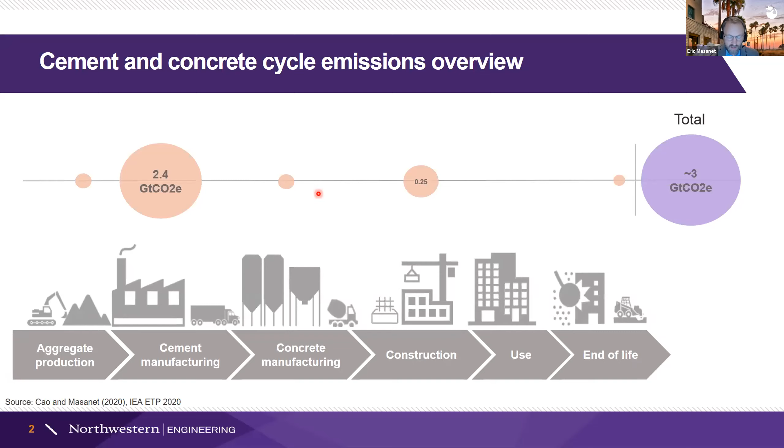There are point source emissions across the cycle. The other major contributor to this overall carbon footprint are the various transportation activities, particularly bringing raw materials from mines to the cement plants, but also shipping of concrete, shipping of cement, and then shipping of demolished building materials accounts for about 10% of the emissions of this cycle.

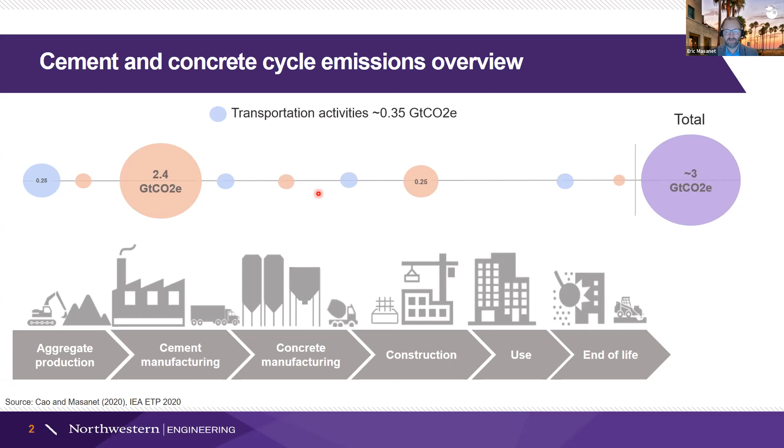So again, this cycle is one of the most important for well-being that we have because concrete is used everywhere in the built environment. It's crucial for development, it's crucial for daily life, and it amounts to 9% of energy-related CO2 emissions. And it's been very difficult to abate so far, and I'll explain why.

But before I get into the decarbonization options, I'd like to acknowledge that the cement industry has made significant progress over the last few decades. So the first graph I'm showing you relates to the thermal intensity of cement kilns.

But there have been some tremendous efficiency gains that have been realized since roughly 30 years ago. 30 years ago, it took around 4,300 megajoules to process a ton of clinker. Today, that value is around 3,500. So we've seen energy efficiency gains through steady technology upgrades to the world's cement plants.

At the same time, we've also seen a gradual increase in the usage of low carbon fuels in cement kilns. So what this graph shows is, compared to 1990, today we're much better at using biomass and other waste fuels that come with lower carbon footprints, overall reducing the carbon footprints of clinker manufacturing.

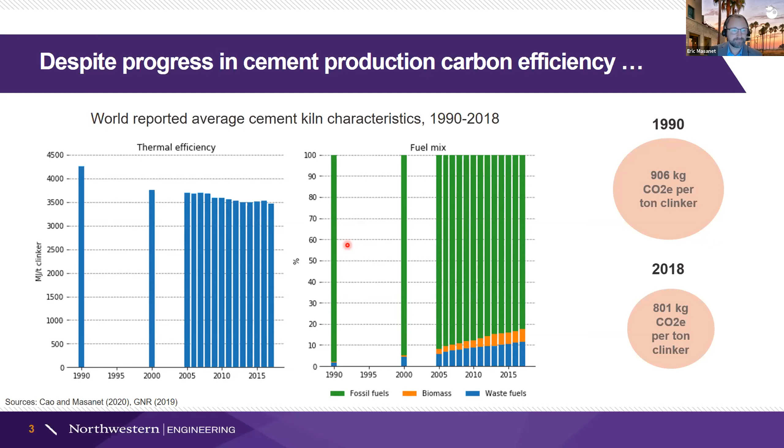So that's more than a 10% decrease over time. Despite that really good progress we're seeing in the industry, global climate ambitions require a really significant acceleration. What I'm showing here are recent results from the International Energy Agency's Energy Technology Perspectives 2020, the most recent technology-rich report on global decarbonization pathways, with a strong focus on the industrial sector.

On the left hand, you see final energy use in the global industrial sector, including not just cement but steel, chemicals, and other industry. The blue dots show the so-called STEPS scenario, the stated policy scenario—the pathway the industrial sector is following based on existing policies and existing technology trends.

The green dots show the IEA's sustainable development scenario—the pathway industry must follow in order to keep greenhouse gas emissions consistent with levels that will meet the goals of the Paris Agreement, specifically keeping long-term global warming to well under 2 degrees Celsius. On the right-hand side, we can see what this means for the emissions budgets for the various industrial sectors and for industry overall.

The key takeaway is, following the sustainable development scenario pathway, nearly all of global industry has to get very close to net zero emissions by mid to late century in order to meet the goals of the Paris Agreement, cement included. For cement, the yellow bars—the solid shade—represent direct energy use emissions. The hashed shade represents so-called process emissions, CO2 emissions from the chemical reactions of making clinker, ordinary Portland cement clinker, within the cement kiln. These have historically been very difficult to abate because they're related to the actual chemistry of the material.

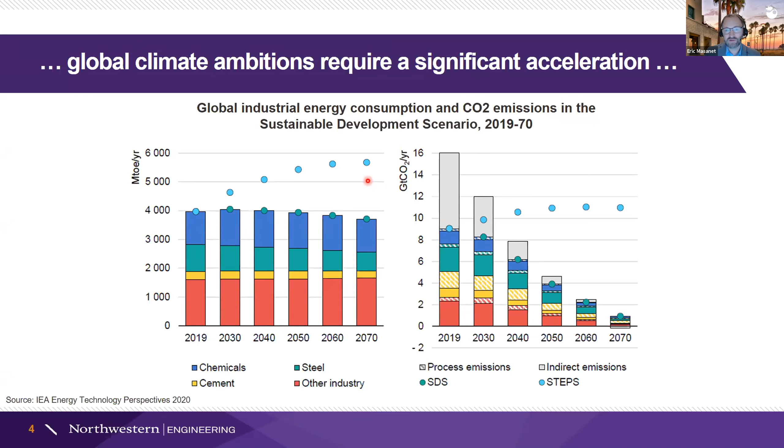So despite great progress, global climate ambitions are requiring a significant acceleration. And in the background, we also have growing demand for cement globally. Present day demand for cement is dominated by China—China produces more than half of global cement quantities. It's been that way for well over a decade now, or several decades in China. The world consumes about 4 gigatons total of cement.

Despite the fact that as economies develop, demand for building materials tends to become saturated—meaning we're no longer building massive new areas of buildings or roads, rather we're maintaining that built environment—we do expect that global cement demand will continue to increase through mid-century. These are projections from my colleague Zhi Cao at Northwestern, predicting roughly a 30% increase in cement demand through mid-century, largely fueled by development needs in Africa, India, and developing Asia.

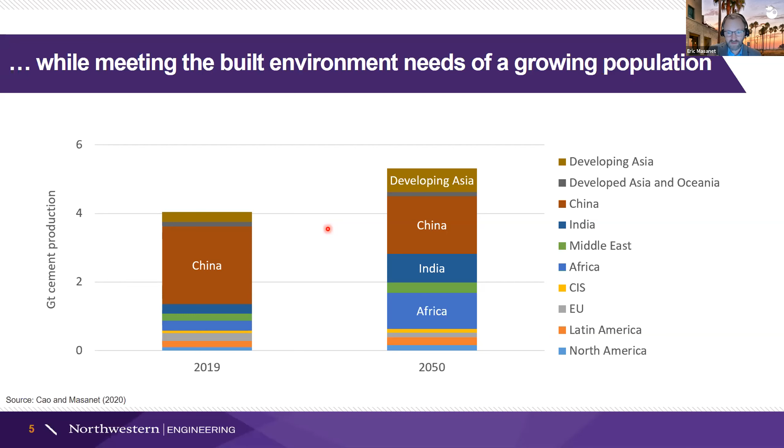And what we see in China is still significant cement demand, but it's smaller than it is in the present day because the built environment in China has become saturated. So this is an important backdrop: not only do we have to reduce the emissions of the industry to near net zero by mid-century, we also have to do so while producing about a third more cement to meet the needs of a growing global population.

Historically, most plans for the cement and concrete cycle have involved lots and lots of carbon capture. For those not familiar with carbon capture, it's a technology that prevents emissions of CO2 from leaving the cement kiln and entering the environment. Rather than letting that CO2 go into the atmosphere, it's captured, sometimes cleaned, pressurized, and generally sequestered permanently underground, either in depleted oil and gas fields or mineral formations and so forth. There's been quite a bit of movement researching and developing carbon capture technologies applicable to the cement industry.

This is one example of a pilot project underway now, called LEILAC. It's a calcium looping CCS technology, being pursued with funding from the European Union and also in partnership with Heidelberg Cement. These pilot facilities—at least one is in place and several others are in the works—are happening.

But if we take a look at the left-hand graph, you quickly get a sense of just how important carbon capture is in many of the decarbonization plans to date. What you're seeing here on the left is the amount of carbon capture that's necessary in the global cement industry in the IEA's ETP 2017 scenario. This scenario was one of the very first to map out technology pathways for meeting the goals of the Paris Agreement. It's called the Beyond 2 Degrees scenario.

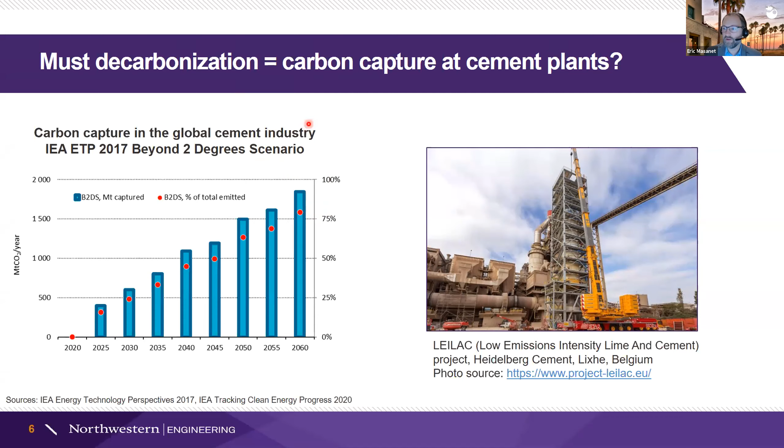And here you can see it's over 75, close to 80%. So roughly what that means is 80% of the world's cement plants—well, actually more than that, because sometimes we can't capture 100% of the CO2—nearly all of the cement plants globally by mid-century have to be equipped with carbon capture and storage under the current regime of decarbonization plans.

Technically, is that possible? Yes, it is. Like I said, the world is investing in CCS. Is it happening fast enough? My interpretation, and the interpretation of many others, is that no, carbon capture is not being rolled out fast enough in order to be on track to reach these levels of penetration by mid-century.

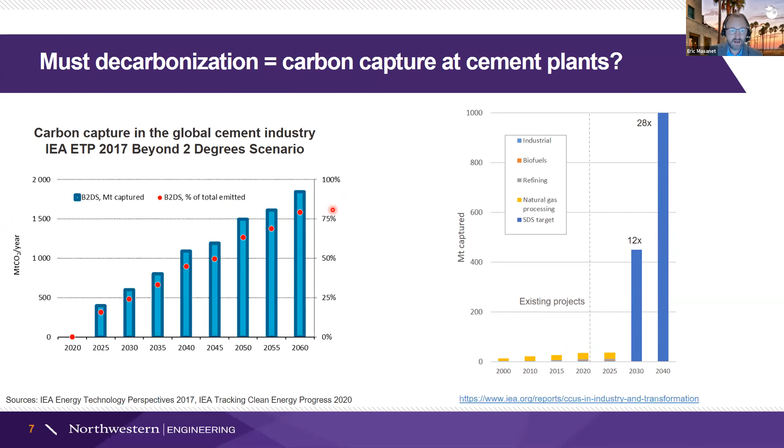But what I'd like to do today is show you that the innovation landscape for the cement and concrete cycle is changing quite rapidly. It is possible to reach net zero emissions without heavy reliance on CCS if we're able to accelerate the development and adoption of a portfolio of other technologies that are being pursued and piloted in different places around the world.

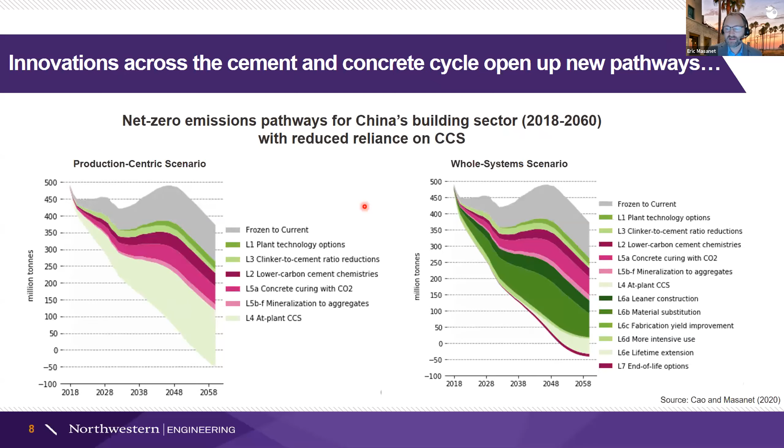I'll explain this graph a bit later, but what I'm going to do is use the example of China's building sector. China's building sector is one of the largest end uses of concrete on the planet—roughly half a gigaton of concrete or cement presently goes into it. We can reach net zero in this example by pulling on a lot of emerging technology levers, accelerating them to market, ramping up their adoption such that we can reduce our reliance on CCS. I'm going to show you how that can be done.

But first, what I'd like to do is step you through some of the existing and emerging levers. There really is a rich portfolio of measures beyond CCS that can help decarbonize the global cement and concrete cycle. Several of these are technologies that we have in hand. The first one is somewhat obvious—I've talked about this already—this is improving the energy efficiency of cement kilns themselves.

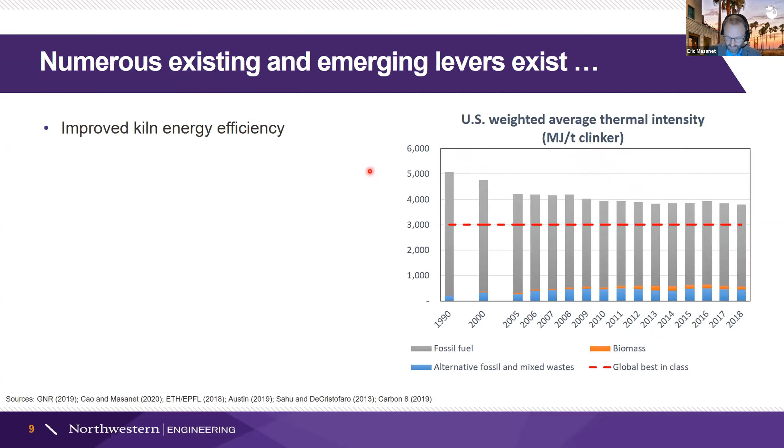What you see on the right are data from the United States, the world's third largest cement producer, but quite a bit smaller than the world's largest, which is China. Here in my country, we've been making steady progress towards adopting more low carbon fuels and improving the efficiency of our cement kilns. But we're still quite a bit away from reaching global best-in-class values for kiln energy efficiency. So there is bandwidth to continue improving the energy efficiency of today's cement kilns, but it'll only take us so far.

There's also been a lot of progress adopting lower carbon fuels. Here's an example of a cement plant run by Lafarge in Canada, which is using large quantities of biomass—I believe baled hay or straw. So there is quite a bit of potential to use more low carbon fuels, particularly biomass, in cement kilns themselves. But this technology is subject to the energy density of the available fuels. It's very difficult to run a cement kiln purely on biofuels alone due to energy density, and we also face potential issues of available supply in different parts of the world.

Another key lever is just reducing the amount of clinker that goes into our cement mixes. It is possible to manufacture cement with clinker mixed with clinker substitutes. The big ones are fly ash, limestone, blast furnace slag, and gypsum, as you see here in this graph. The world has been making progress towards using less carbon and energy intensive clinker in its cement blends, offsetting that material with much lower energy and carbon intensive materials like industrial byproducts such as fly ash or simply ground limestone. The technical potential for doing so is roughly about here.

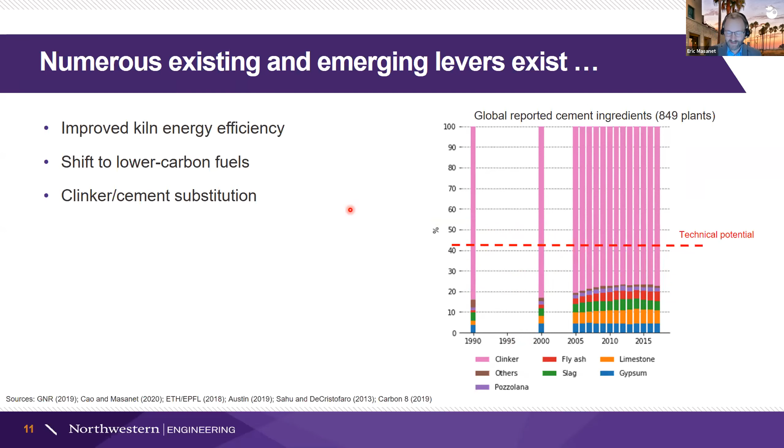So we can make cement, and we are in many parts of the world, with clinker to cement ratios lower than 60%. When we do so, we substantially reduce the overall carbon footprint of cement. Those are measures that we have in hand. As you can see from the various plots I'm showing you, we are making progress, but over the course of 30 years, that progress is pretty slow compared to where we need to go to get to net zero by mid-century. So we're starting to consider a lot of new measures.

There's been a lot of development in one particular category, which I'll call low energy, low carbon cement chemistries. As I go through some of these emerging levers, I'll also give you an idea of what analysts think their TRL level is - the technology readiness level. It's a scale that's used often when classifying the availability or state of development of emerging technologies. If you're not familiar with it, I've inserted this cartoon here just to give you a quick idea.

A TRL1 is initial conceptualization of a concept. TRL3 is proof of concept, going all the way through to TRL9, where it's basically available - it's in operation, it's available on the market.

So low energy and low carbon cement chemistries seek to change the chemistry of the clinker material itself. We want to do that because if we can, we can potentially avoid emitting CO2 during the chemical reactions necessary to manufacture clinker.

One company that's already introduced its formulation onto the market is Solidia. There are a number of other formulations, and their availability ranges from fairly early proof of concept all the way through to market availability. But just to give you an idea of the concept, let's use Solidia as an example.

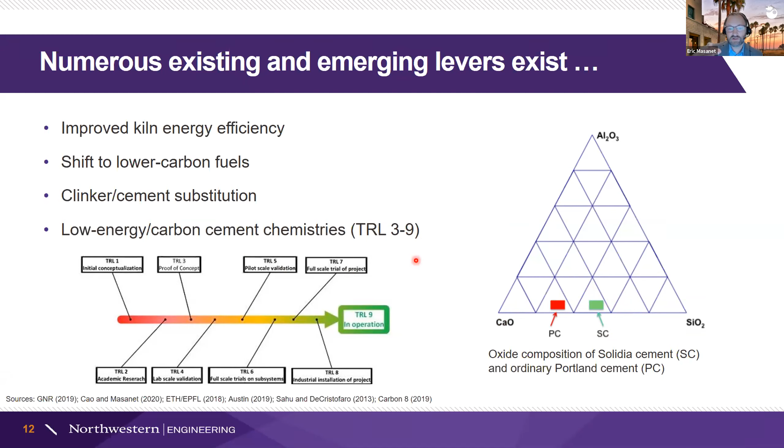Most of the carbon emissions from the chemistry of making clinker come from limestone, calcium carbonate. The Solidia mix uses less calcium carbonate, therefore it has less lime content, meaning less CO2 is emitted during chemical reactions. It also comes with lower processing energy. So by shifting the mineral composition in these low carbon cements, we're able to produce clinkers that emit less CO2 and ideally also have lower energy requirements for processing. There's a lot of innovation there.

There's also been quite a bit of attention placed on replacing the existing kiln technologies, which are run largely on fossil fuels globally, with renewable or low carbon fuels. In the IEA's Energy Technology Perspectives 2020, they reviewed the state of different cement kiln technologies. There are two major classes of alternative kiln technologies - one is running those kilns on renewable fuels.

The first class is direct electrification. Remember, these kilns are running at 900 plus Celsius, so they're very high temperature. But there are pilot projects and projects underway to explore directly electrifying those kilns. If we can do that, we can run them on renewable energy ideally, and therefore eliminate a substantial share of the emissions for producing clinker if they're being made based on carbon-free energy.

There's been innovation looking at direct electrification of kilns, also using concentrated solar power and fluidized bed technology to use the thermal energy from the sun's rays to heat the mineral mix. There's also been attention placed on the use of hydrogen. If we can make green hydrogen from renewable energy and water, then we now have an energy carrier that can be used in many industrial processes, potentially also cement kilns.

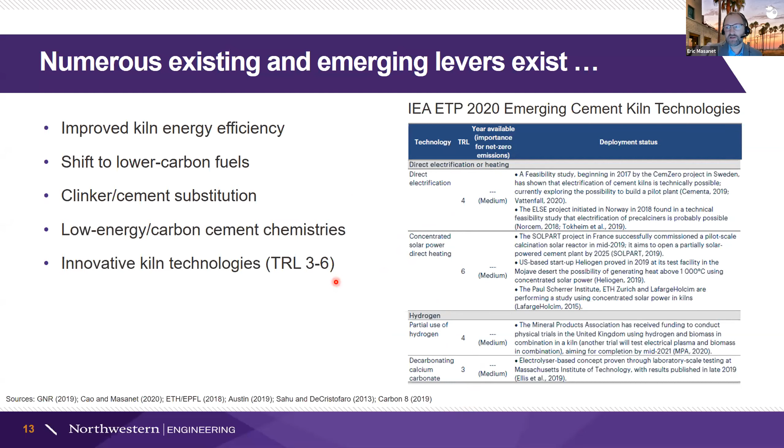The key, though, is that these kiln technologies are all fairly low TRL levels presently, so it will be a while before we see these technologies being available on the market. They also require having a renewable energy infrastructure and supply system in place in order for them to be successful.

Moving on briefly, there's been a lot of attention placed on just reducing the overall amount of concrete we demand in our societies. It's been recognized recently that a very powerful mitigation opportunity within the industrial sector writ large is: can we simply produce less material, less goods, fewer products, so that we just need less of those things in the first place. When it comes to concrete, there are lots of researchers looking into how we can design buildings or building components that just use less concrete in the first place.

For example, this is, I think, a well-known example that's being developed at ETH and EPFL in Switzerland, where it's a floor panel that uses roughly 50% less concrete because it has this unique design to it, which I believe was made by 3D printing.

And if we can replace poured floors with panels that use 50% less concrete in buildings, now suddenly we've made a big step forward towards reducing the emissions of cement and concrete production simply by avoiding the use of concrete in the first place.

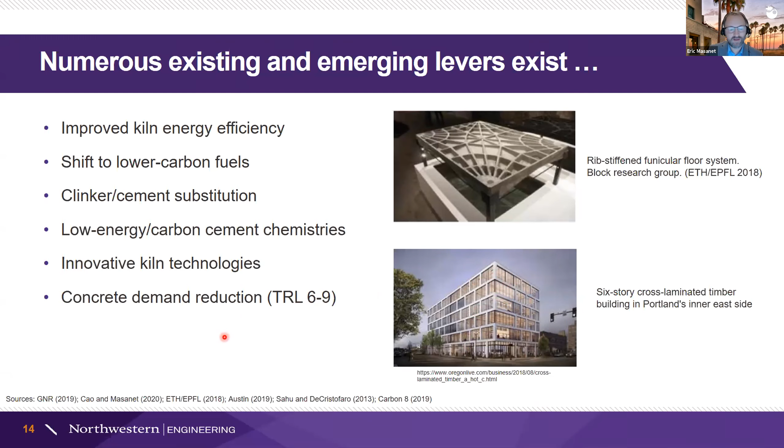And another key strategy that's emerging in many parts of the world is replacing concrete structures with cross-laminated timber. So this is an example of a building here in the United States in Portland. Cross-laminated timber has seen lots of innovations and improvements over the past few years. Now we're able to build taller and taller buildings using cross-laminated timber, which reduces the amount of concrete necessary in the structure, also ideally in the foundations and so forth. So simply using less concrete or replacing concrete in the built environment is another key strategy.

And then finally, when it comes to carbon capture, I've already mentioned that one key technology is carbon capture and sequestration, meaning we put the CO2 underground or permanently sequester it. There's also innovation around capturing carbon and utilizing it in useful materials. So one key example in the cement industry, which is a commercial technology, is called CarbonCure. Here, CarbonCure uses captured carbon for curing the concrete.

So all concrete, when it cures, absorbs CO2 from the atmosphere. What CarbonCure does is really control the process, use captured CO2 to help cure the concrete. And by doing so, we get stronger concrete that requires less cement in the mix.

But there are also companies and technologies that are looking into valorizing industrial waste by reacting them with captured CO2 to produce what's known as artificial aggregate. So if we can produce artificial aggregate, we can use it in new concrete blends and therefore both capture carbon and reduce pressure for mining.

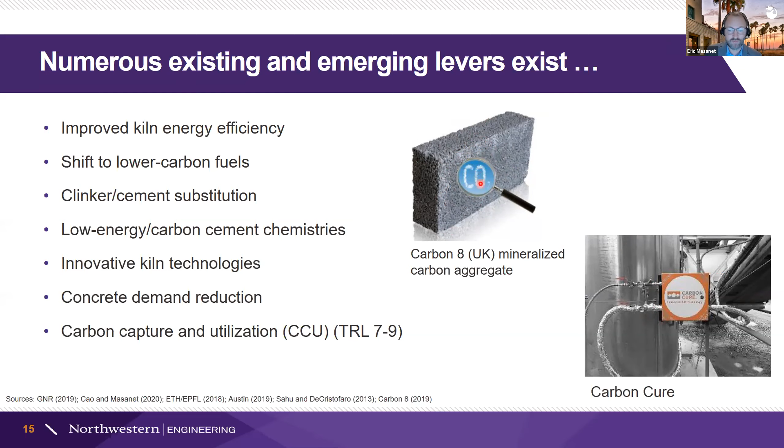So that is the innovation landscape that we're seeing. And you can imagine that we have many emerging options that reduce emissions through different mechanisms at different places in the cement and concrete cycle. And really, to understand their full potential, we need to take a systems approach. So there are a lot of exciting innovations, but to understand which we can roll out by when and where, we need to use a whole systems analysis approach. And that's what I'll present to you next.

So in my research lab, in partnership with Dr. Cao, we've developed and will soon release publicly a new model we're calling Imagine Concrete. Essentially, the model structure is what you see here. So the model considers the entire cement and concrete cycle, starting from mining, going all the way through to construction and the built environment and end-of-life concrete flows. The model tracks mass flows throughout the system.

It also calculates all of the energy inputs that are required at all stages as a function of the technologies deployed. And importantly, it has an emissions layer capability as well, where we're tracking the various emissions fluxes, so positive emissions emerging from energy use and reaction emissions in the system, but also CO2 sequestration. If we can capture CO2 at the plant, if we can capture CO2 and use it for building materials, how much CO2 is taken up by the built environment.

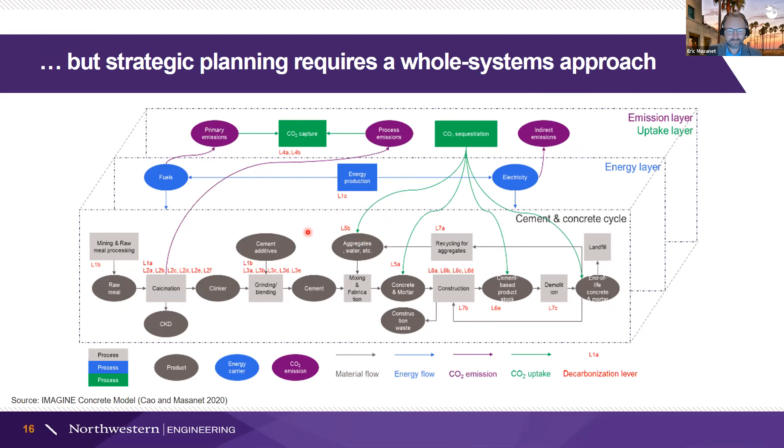An important part of the process, though, that I really want to stress is accounting for CO2 fluxes. So you might say, well, isn't that pretty straightforward? Here we have a cement kiln, it emits CO2. Isn't that the major contributor? Well, that is true. It's about 75% of all the emissions.

But if we look at decarbonization, we have to take a very careful accounting of CO2 flows, because CO2 emitted from the kiln can be captured if we roll out CCS. It can be sequestered depending on the geography that's available. Is there enough geological sequestration capacity or not? Or do we take that CO2 and we turn it into useful products or use it, for example, for cement curing? When we use concrete in the built environment, how much CO2 is taken up by the built environment itself?

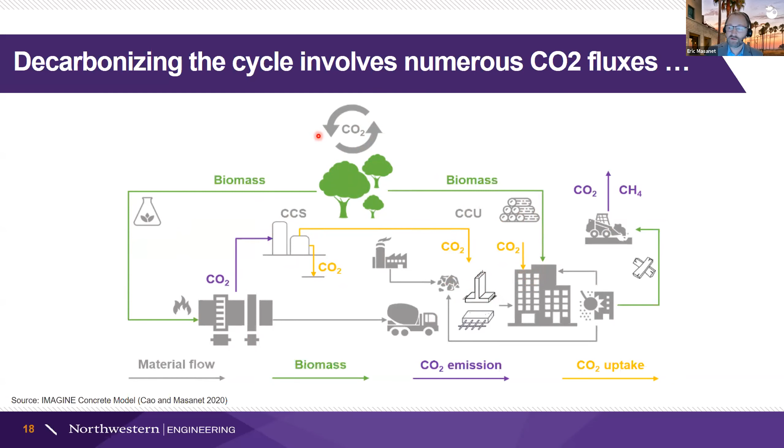If we think about replacing concrete with, let's say, cross-laminated timber, that itself is a source of carbon sequestration. We can burn it in the kiln. We can use it for carbon capture and create a negative emissions technology, or we can use biomass directly in buildings and offset concrete. The accounting for all of these CO2 fluxes turns out to be very important because they're quite significant at different places in the system.

So the model that I'll present, the results I present, the key takeaway is we're always calculating the net CO2 balance, because we have in the system many positive fluxes of CO2 emissions, primarily cement production, but also all the transport, all the on-site activities and so forth that I mentioned are tracked in the model.

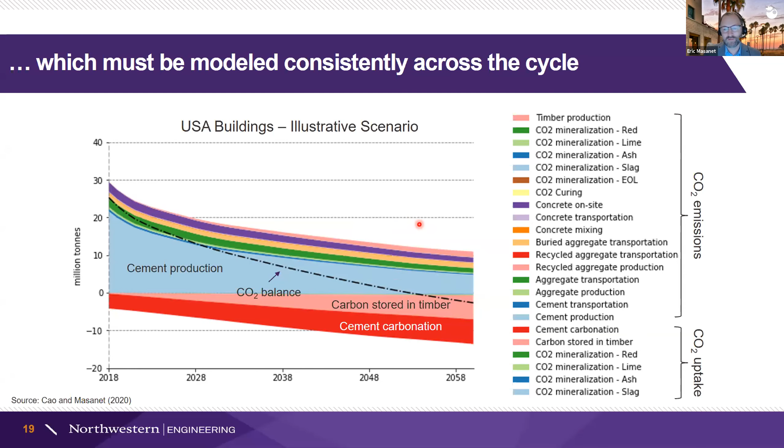But we also keep track of any carbon storage or any carbon sequestration that is available through the deployment of technologies, the use of mass timber. And we also keep track of the cement carbonation that's occurring in the built environment itself, which is a function of how much concrete is in place. Is that concrete exposed to the environment? How thick is that concrete? Are there surface treatments and so forth? All of this accounting is really important for realistic pathways analysis.

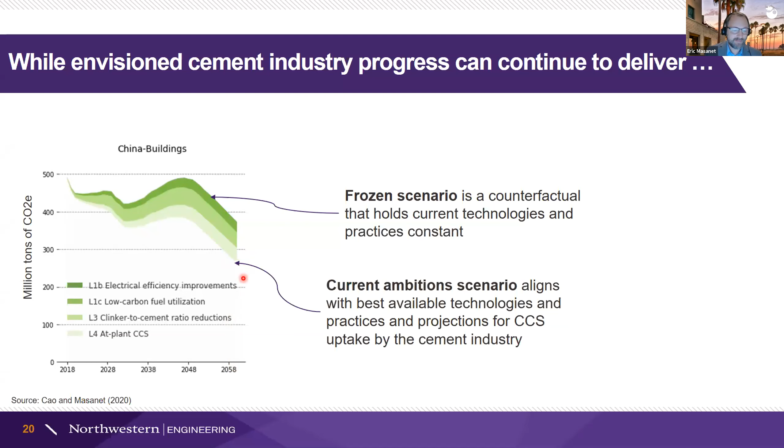So the difference between doing nothing and where the industry is likely to go with no further interventions gives us an idea of just how much progress the industry is expected to deliver. And it's fairly significant. So for example, for China buildings, roughly a quarter of the decarbonization is expected to already occur based on China's announced plans for efficient technologies, renewable energy policies, and so forth. However, we still have a big gap to close to get to net zero. So what I'll show you next are the remaining wedges that we've analyzed in the model.

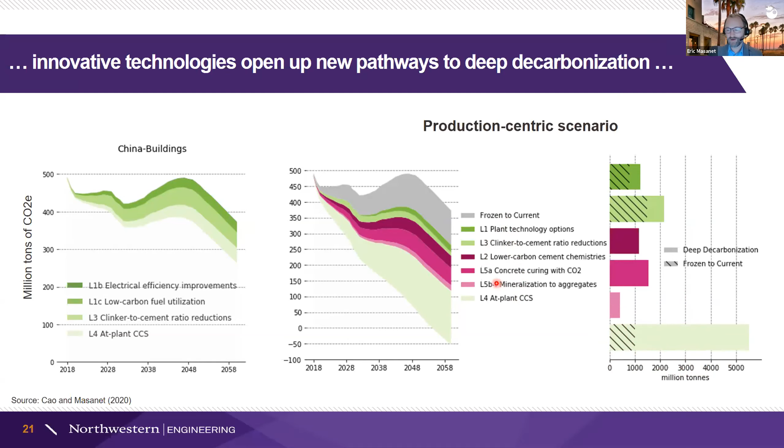So in this graph, you're seeing the total cumulative emission savings that are associated with each of these measures. The hash shows what's expected to occur under current ambitions, and the remainder is what has to occur to get to net zero. So we're still quite heavily reliant on CCS. However, we can envision a different future. If we open up the possibility of demand side reductions and demand side changes, can we get by with less cement in our concrete mixes? Can we get by with less concrete in the built environment? How do we do that?

Well, we could consider strategies that focus on leaner construction, not only less waste at construction sites, but using just the right amount of concrete for the components and so forth, thereby reducing the amount of concrete necessary to provide structural services. We can consider substituting. Essentially, in our scenario, we're looking at cross-laminated timber subject to local potential supply constraints in China, and reduce the dependency of our future structures and buildings on concrete itself.

Other strategies, improving fabrication yields, more intensive use. So this has to do with lower floor area per capita, getting closer to decent living standards for all, extending the lifespan of buildings, and then finally reusing components from buildings at their end of life, and limited amounts of concrete recycling above the baseline, essentially.

This is a different pathway that has, frankly, no more reliance on CCS than is already predicted. You can see here that essentially the CCS wedge more or less disappeared, and we're replacing it with demand reductions. So on the right-hand side, we can see how the burden has now shifted.

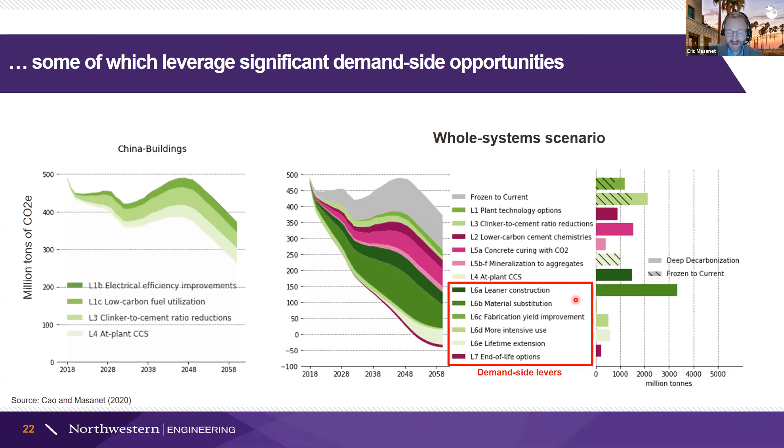There's still quite a bit of burden on cement and concrete producers, but now we're able to pull on numerous other levers enabled by innovation, pulling in many other stakeholders into the decarbonization challenge with significantly less reliance on CCS, but to be honest and candid, much more reliance on demand side actions that are going to require the involvement of many new stakeholders.

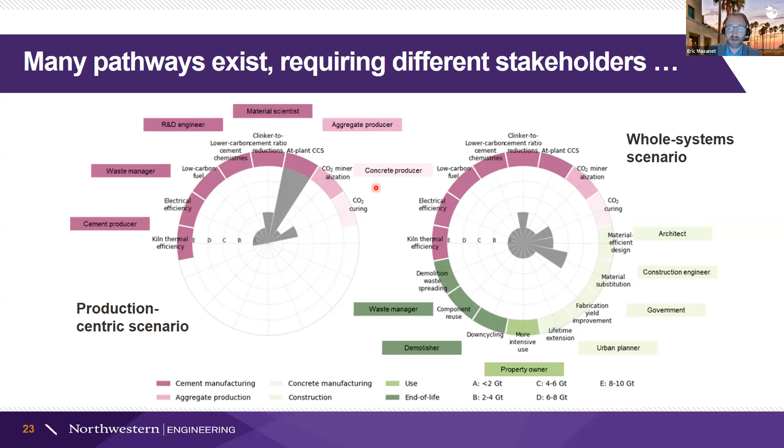In the whole system scenario, where we relieve the pressure on the supply side and focus much more on demand side mitigation measures, now we've enabled a whole host of new stakeholders, architects, urban planners, construction engineers, government officials, property owners, and so forth. And we can see that the decarbonization opportunity has now shifted to these stakeholders as well. This involves many more stakeholders, many more technologies, many more levers, and we see it as a narrative that is worthy of, I think, greater consideration as we look to decarbonize the cycle out to mid-century. If we can reduce the demand for materials, we can make large strides with existing technologies quite soon. That's not to say that there aren't many barriers that have to be overcome.

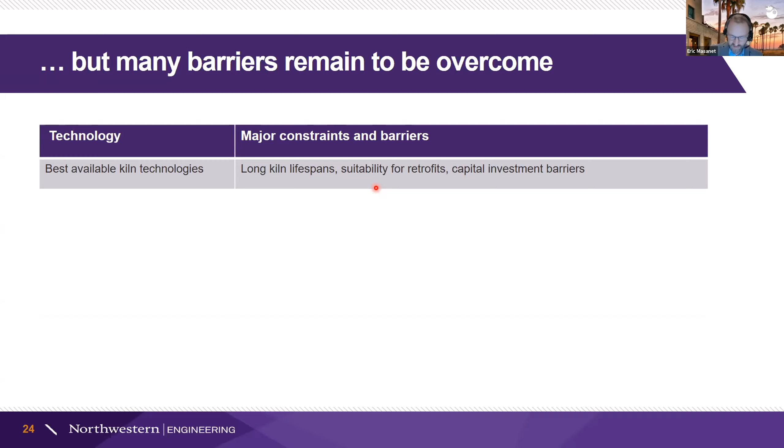So I'm going to wrap up just by acknowledging some of the key barriers that we've identified in our research for each of the technology classes. So shifting to either best available kiln technologies or even emerging technologies in the future has to acknowledge that cement plants require enormous capital investments, hundreds of millions of dollars. Cement kilns have long lifespans, 20, 30, 40 years, and so forth. Once those technologies are put in place, they're very difficult to decommission until they reach the end of their useful life. So just the stock turnover constraints we're seeing for cement kilns may pose a barrier to adopting some of those new technologies.

I've already talked about shifting to low carbon fuels. It is a viable strategy. It can reduce emissions, but it is subject to low carbon fuel availability, which is quite variable around the world. And we can't replace all of our input fuels with biomass, so to speak. Clinker substitutes, we know how to do it, but often the amount of clinker that we can substitute is subject to building and materials specification barriers, perceived risk issues in end user markets and so forth. So just because it's technically feasible doesn't mean that markets are willing to accept high ratios of non-clinker materials in cement blends without the right incentives in place. Technically, it can be done, but there are market barriers to doing that.

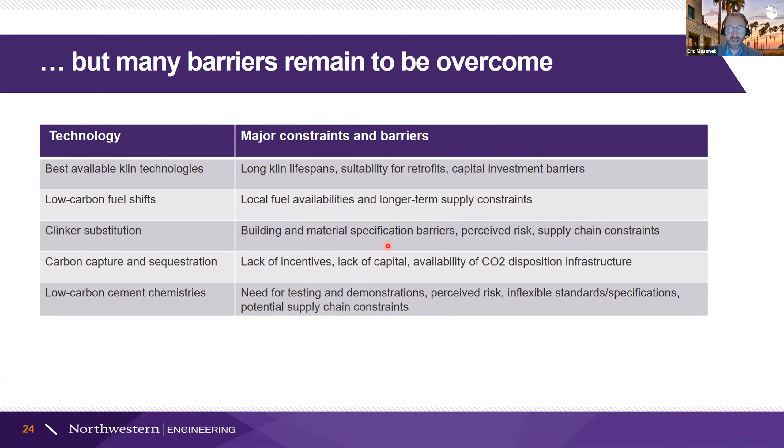We've talked a little bit about CCS being behind. It's quite expensive. We need more incentives around the world. We need large-scale CO2 infrastructure in order to roll this out to industrial plants, and it's not happening nearly as fast as we'd like. And then we have innovations, as I mentioned, in low-carbon cement chemistries. Here, in speaking with industry experts, people who have worked in the cement industry, they see the potential for these low-carbon cement chemistries, but they point to the fact that there still will be perceived risk with those new chemistries, that there are inflexible standards in place and so forth, that it may take 1 to 2 decades before we see really substantial uptake of low-carbon cement chemistries. That's a big barrier that needs to be overcome through better incentives, better demonstrations, better pilots, and so forth.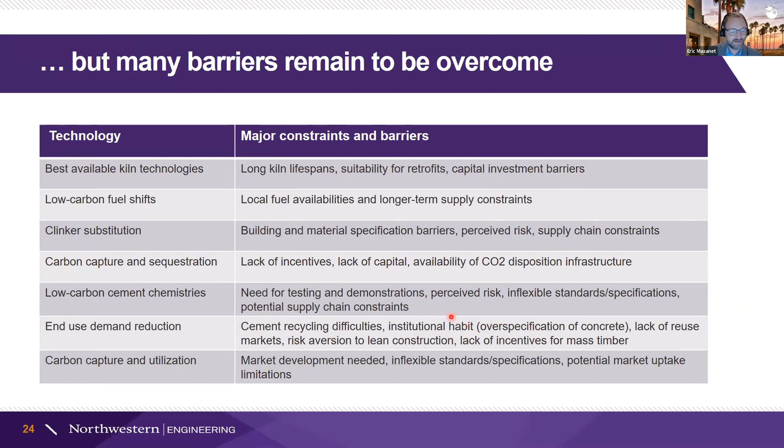Reducing the amount of concrete in the built environment can be difficult if architects aren't on board with using less concrete, if they don't feel comfortable with switching to mass timber. Overspecification of concrete as a factor of safety is quite common and so forth. So many barriers that need to be overcome. That doesn't mean that we can't start working on operationalizing plans that move us towards net zero, but it's going to involve lots of stakeholders, lots of technology interventions, and lots of policy action to support the transition.

So just to wrap up, before I turn it over to questions, yes, we can get to net zero in the global cement and concrete cycle with technologies we have in hand, and also technologies that are in the pipeline will open up new opportunities for doing so. We can get there by focusing solely on the industrial sector itself.

However, that's going to require massive uptake of new kiln technologies, massive rollout of CCS and so forth. And some of those trends are not moving nearly as fast as they need to in order to stay on track for addressing the goals of the Paris Agreement.

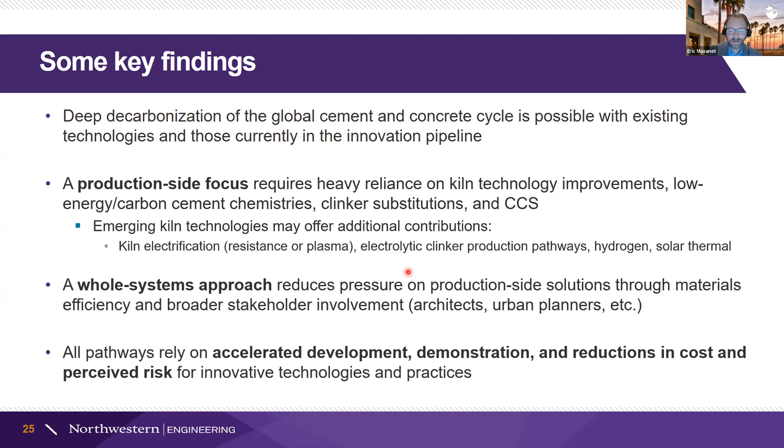A whole systems approach, which focuses also on demand reduction, opens up many new levers and many new opportunities for reaching net zero, potentially more quickly, potentially more cheaply, but it does involve a lot more stakeholders than we have to date. And for any of the pathways we're able to imagine when we look at combinations of these levers, many of the technologies need accelerated development, meaning they're at fairly low TRL levels or they're facing barriers with market uptake.

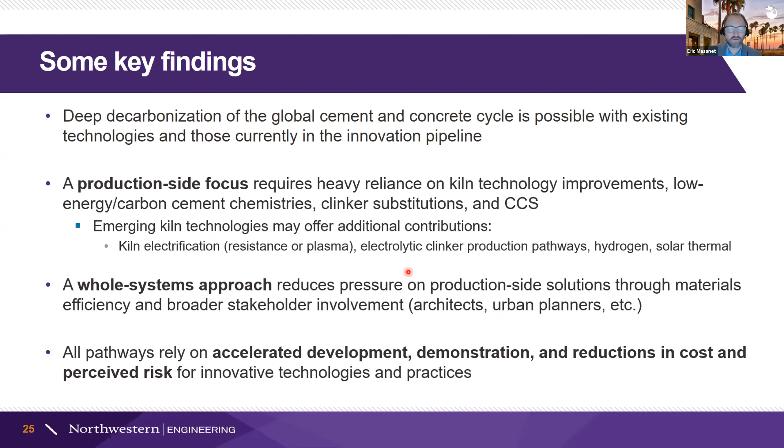So we need to really invest a lot more and quite soon in bringing those technologies to market, demonstrating, reducing perceived risks, putting standards in place and so forth. Otherwise, not only the demand side vision, but even the production-centric vision won't come to fruition in time to get to net zero when we need to. So there's an incredibly large policy support element to all of this as well.

Okay, I see some questions here on the chat. One question is, if it will be more challenging for China in the sector to meet the future carbon neutrality of 2060, any strategic suggestions about this? Let me see. So I'll bring up the chat. I'm sorry. Okay, more challenging for China in the sector. Strategic suggestions.

Well, our team and others have put together these so-called technology roadmaps for achieving net zero. It will be challenging for China. China's cement kilns are already quite efficient, among the most efficient in the world. Clinker to cement ratios are already quite low, among the very best in the world, and concrete demand will remain quite high. Presently, as I showed, more than half the cement in the world is produced by China, largely used in China. And even though that demand will slow down, it's still really significant out to mid-century.

So, the big barriers that I see are related to how fast the technologies can be rolled out. There are plans for China which show massive amounts of carbon capture and sequestration. There are great geological resources in China for CCS, for permanent storage, but we need the infrastructure to be put in place. Demand reduction, however, is potentially a large wedge for China.

So my colleague Zhi Cao, who did his PhD in China and has studied the China building industry and concrete uses, likes to point out that the building lifespan in China, for example, is often quite short. So even putting in standards and incentives for extending the lifespan of buildings in China will go a long way toward reducing overall concrete demand, which helps us take a step towards decarbonization. If we don't produce that concrete in the first place, we don't have to abate the emissions.